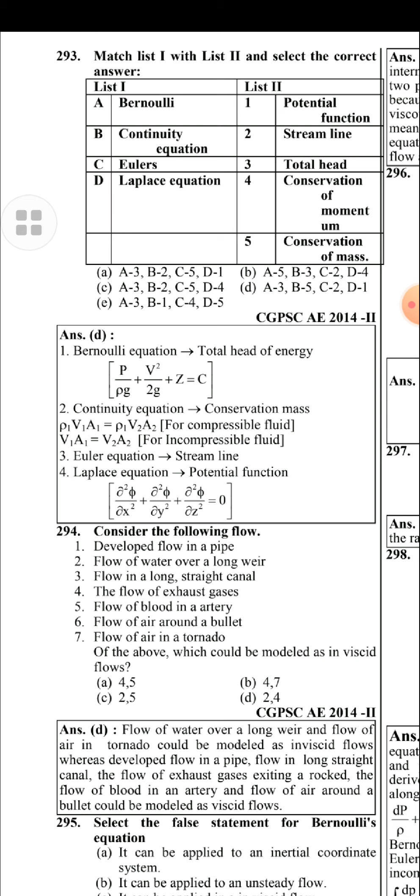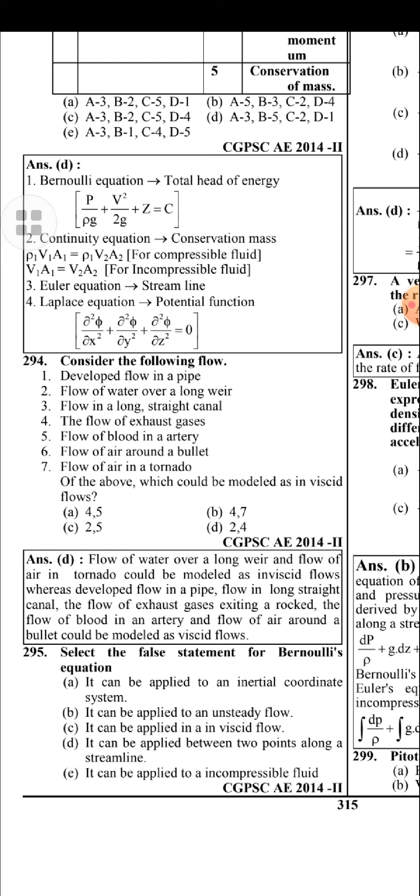Select the false statement for Bernoulli's equation. And the correct answer is: it can be applied to an unsteady flow. This is wrong; it can only be applied to steady flow.

Bernoulli's equation can be applied to an inertial coordinate system in inviscid flow between two points along the streamline and incompressible fluid, because in inviscid flow the viscosity is zero and hence no viscous force acts on the body. Also incompressible flow means the density remains constant, whereas this equation cannot be applied to unsteady flow, rotational flow, and inside the boundary layer of fluid. Bernoulli's equation can be taken as P1 by rho g plus V1 square by 2g plus Z1 is equal to P2 by rho g plus V2 square by 2g plus Z2.

A venturimeter is generally used to measure the rate of flow of water. Euler's equation in the differential form can be expressed as, where dp is the pressure, rho is the density of the fluid, v is the velocity, dz is the differential head, g is the gravitational acceleration: dp by rho plus v dv plus g dz is equal to 0.

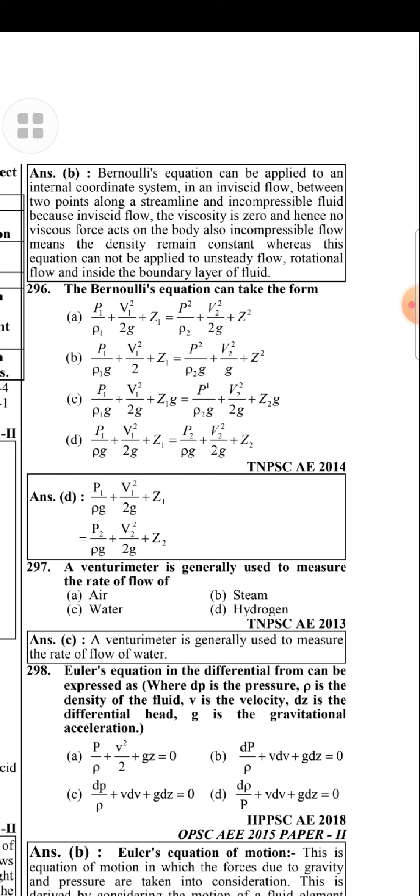According to the Euler equation of motion, this is the equation of motion in which the forces due to gravity and pressure are taken into consideration. This is derived by considering the motion of a fluid element along a streamline as dp by rho plus g dz plus v dv is equal to 0. Bernoulli's equation is obtained by integration of Euler's equation of motion, assuming the fluid is incompressible.

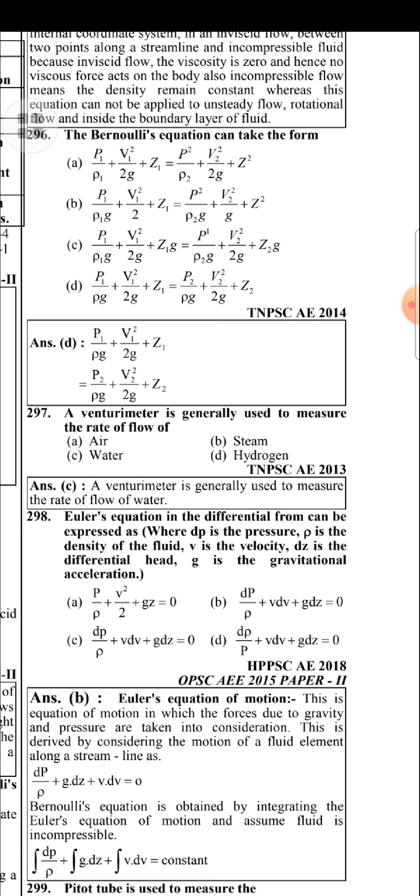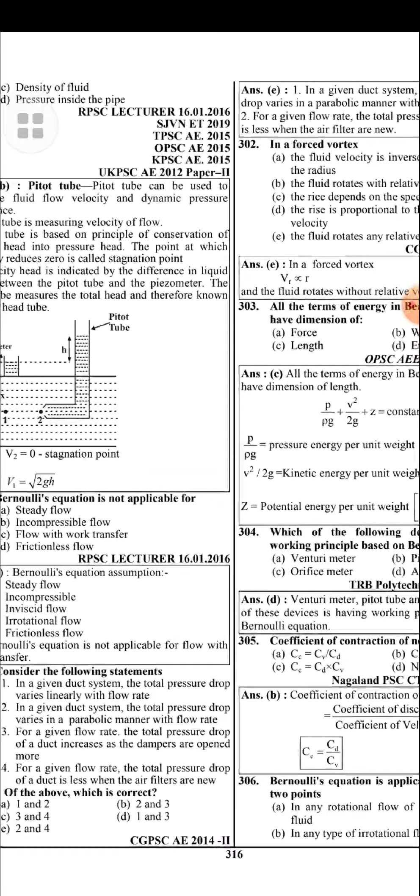Pitot tube is used to measure the velocity of the fluid. A pitot tube can be used to measure the fluid flow velocity and dynamic pressure difference. A pitot tube is based on the principle of conversion of kinetic head into pressure head. The point at which the velocity reduces to zero is called a stagnation point. The velocity head is indicated by the difference in liquid level between the pitot tube and the piezometer. The pitot tube measures the total head and is therefore known as the total head tube.

Bernoulli's equation is not applicable for flow with work transfer.

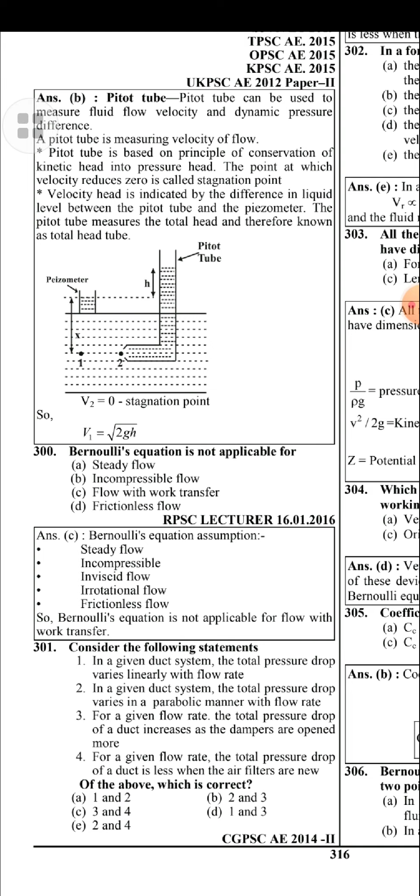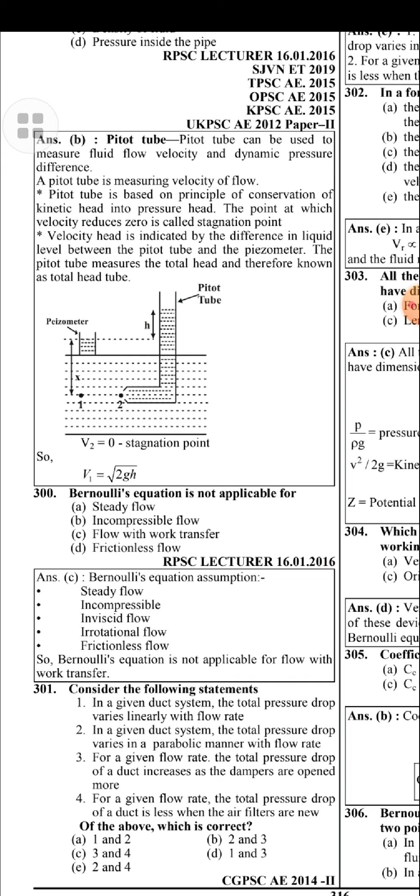Consider the following statement. Correct: in a given duct system, the total pressure drop varies in a parabolic manner with flow rate. For a given flow rate, the total pressure drop of a duct is less when the air filters are new.

In a forced vortex, the fluid rotates without relative velocity. In a forced vortex, V is directly proportional to r and the fluid rotates without relative velocity. All the terms of energy in Bernoulli's equation have the dimension of length.

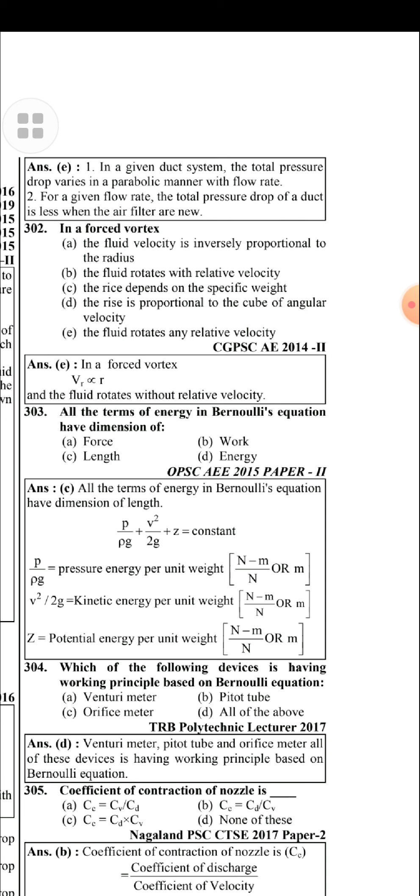Venturi meter, pitot tube and orifice, all of these above have a working principle based on Bernoulli's equation. Coefficient of contraction of the nozzle Cc is equal to Cd by Cv: coefficient of discharge by coefficient of velocity, that is, coefficient of contraction is equal to coefficient of discharge by coefficient of velocity.

You can also write it as: coefficient of discharge is equal to coefficient of contraction into coefficient of velocity. Thank you.